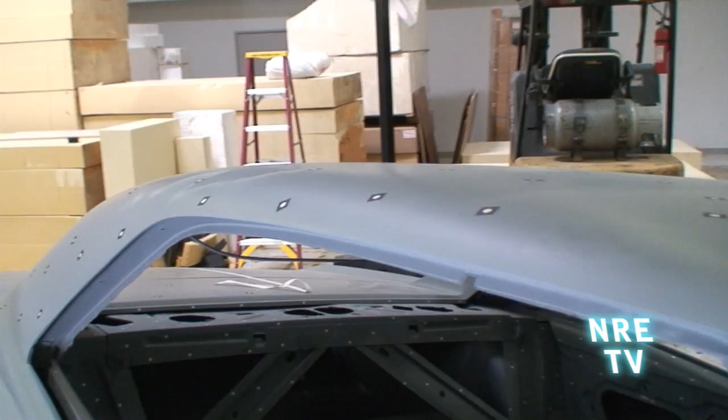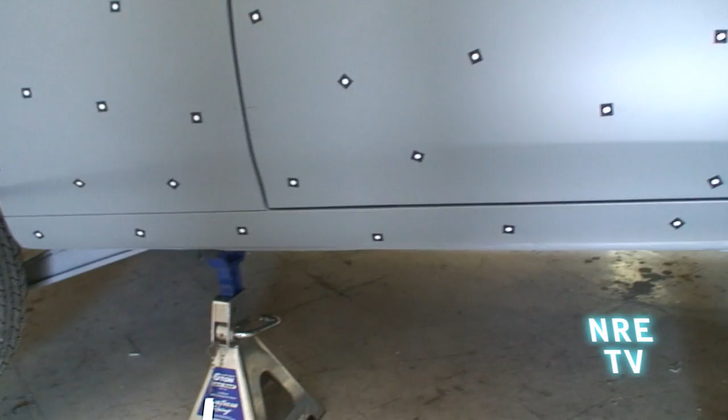So this is the GTO where it sits right now in the process of the building. Just kind of wanted to go over a couple things that we've done. We've skinned this quarter, so we cut this quarter out and replaced it. We took off the drip rail on the roof here. We got rid of the door handles. Got rid of all the trim holes because we're going to end up blending all of that in, so there's no trim on the bottom there.

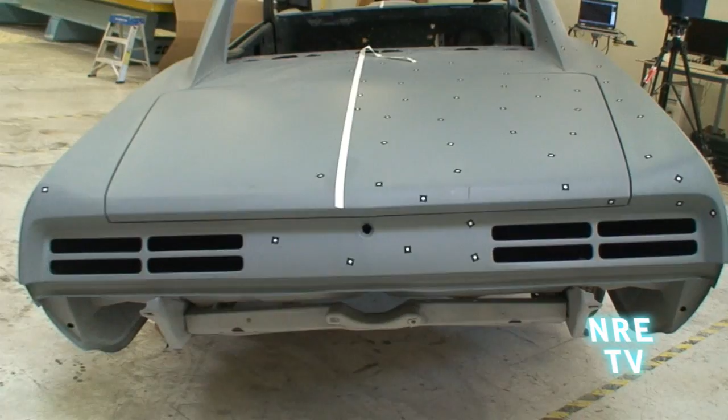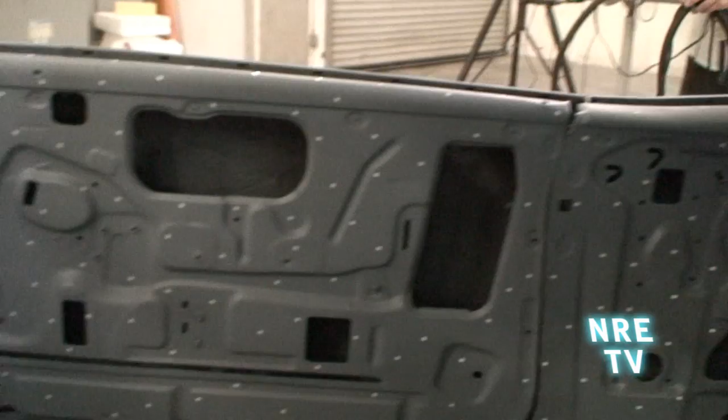Used a shrinker and replaced a lot of the metal around the windowsill. We've pretty much blended the rear tail lights into the fenders there. We sandblasted the entire interior, exterior, did all the metal work. We started doing some rough body work and got it ready for 3D scanning. So we're just finishing with 3D scanning at the moment. You can see all the little white stickers on the inside of the car everywhere.

What this is going to do is provide a great way for us to lay out the engine and the transaxle, roll cage, dash, center console, you name it. I mean, our goal with the car is right here in the rear, we're going to actually make a custom bumper with diffuser panels and exhaust outlets.

And so we're going to get the scan data, and then we're going to develop a 3D CAD CAM program in there, and then cut the negative out of that and make the part out of the negative. And we'll do the same on the interior. That's why we've got the interior basically gutted at this point.

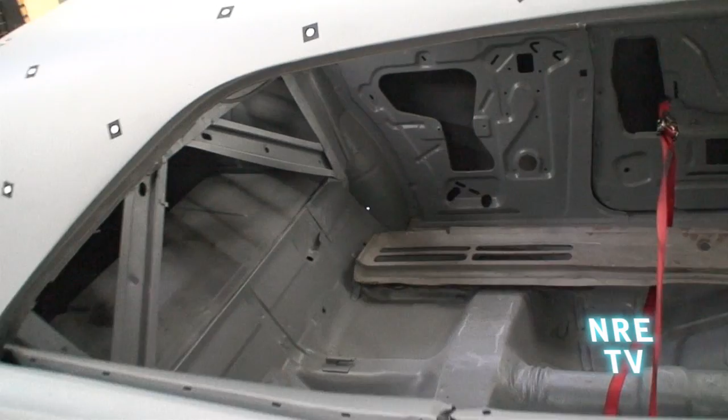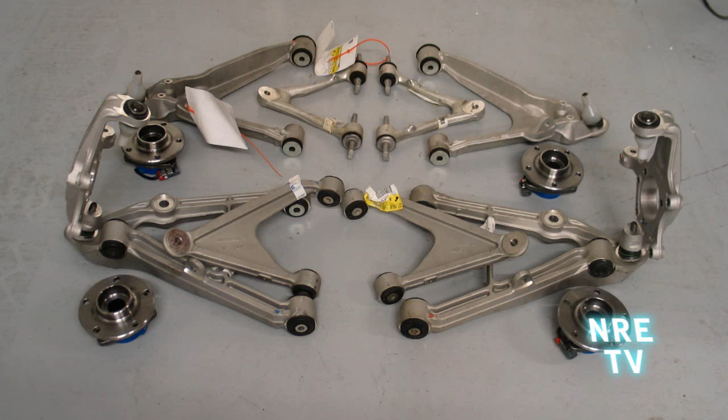So we've basically gutted the interior, took the dash out. We're gonna make a custom interior. We're gonna make it look like an Aston Martin inside of this 67 GTO. And it's basically a whole new realm of what we can do with a hot rod. I mean, it's bringing us to like OE status with what Alfred here can do for us.

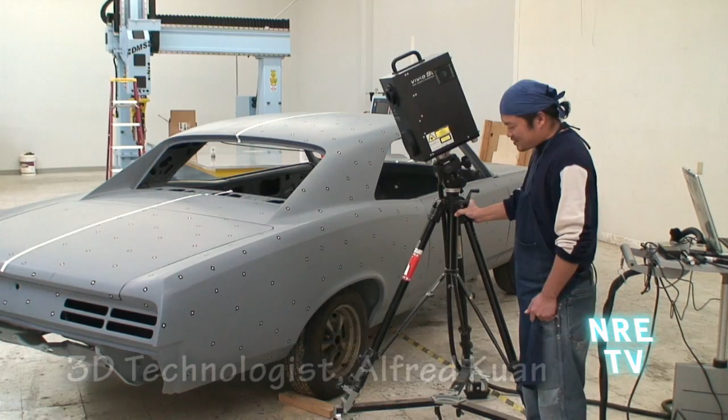So it's pretty cool. Okay, so basically for this project, what we're using is a red laser-based 3D scanner, and we're going to digitize this car. And in order to do that, what we've done is put a lot of these markers or targets for scanning. What that does is that helps us align each individual 3D scan of the car.

What we're doing is that we scan the car, and the entire car is composed of about maybe 200 to 300 different shots individually. And so each shot that we take covers an area maybe a foot and a half, maybe about 2 feet wide. And so the markers are there to help us align all the different shots together. And at the end, when we merge all the data together, we get this car in 3D.

So what type of equipment are you using there, basically? We're using a Konica Minolta Vivid 9i. This is their top-of-the-line scanner for general purpose. We've had this for about 4 years, and it produces really good results. It comes with 3 different types of lenses.

There's a wide-angle lens for scanning really large objects from really far away, but it produces not the best results. The data is not accurate. So the further away you are from the object you're scanning, the less accurate the data is. There's a middle range lens, and then there's a telephoto lens for high res, closer work, if you're scanning an object from about maybe 500 to 600 millimeters away.

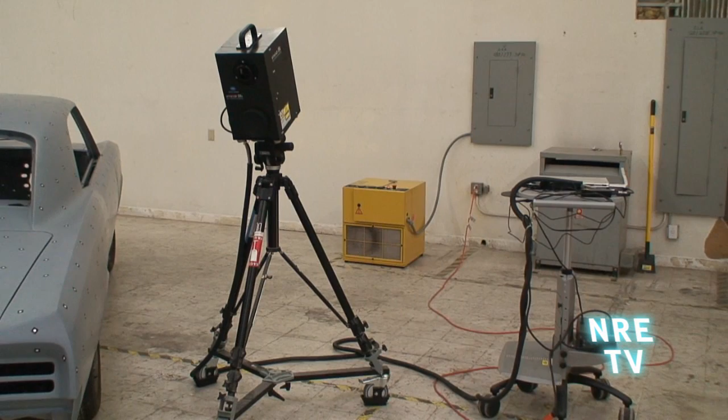But it's basically going to transform the way we can build cars, because we can recreate the actual surface, and then we can model parts off of that. So the sky's the limit. It's like getting a welder for the first time when you were a kid. This is like the Wild West of building things in the hot rod world.

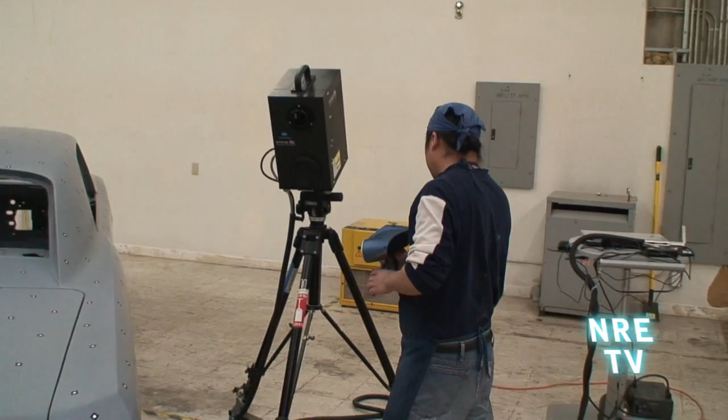We use that Minolta for the outside, and then we use this handheld system. You hold it, it's hooked up to the computer with a USB cable. It weighs about 7 pounds, so after a while it does seem heavy. But this lets us get into the tight corners inside the car that we can't otherwise do with the Minolta. So it's basically the mini version to get into little tight areas.

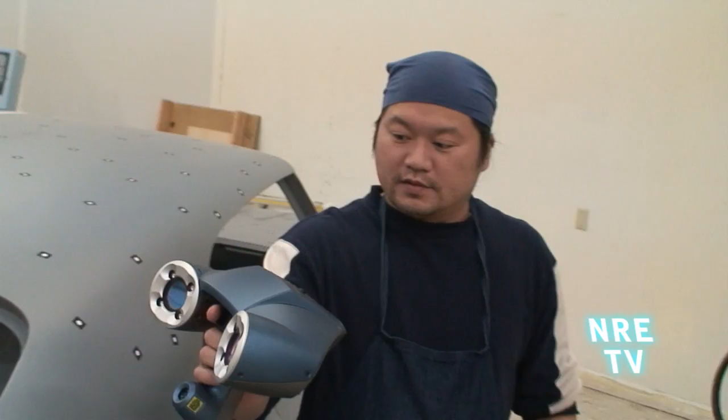Let me see what that actually looks like. Can we get a close up there? What's the difference in the colors there? What is the purpose of that? Or actually, no, they're the same. It's just the way the light reflects to it. Huh.

What does something like that cost? This one I got used. This was a demo from a dealer. Three years ago, this thing brand new was close to 60 grand. Just imagine dropping this, right? I have nightmares, man. I have nightmares about working on a job in a desert somewhere and dropping this thing. I got it used for about 30.

Wow. Sure, and then basically you take data from that unit, and then you overlap data from the small unit onto it in areas that you can't get. Right. And that'll basically paint the whole picture for you.

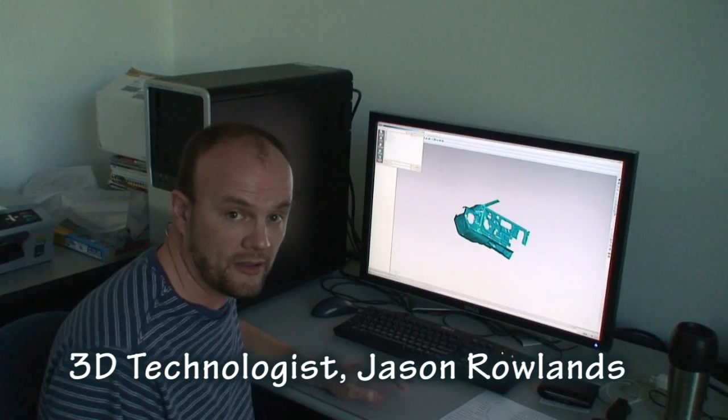Okay, my name's Jason Rowlands. I'm helping Alfred here. This is software called Geomagic. What you see before you is the sections of the scan which I've taken. These are all the separate files that we've taken thus far, and what I'm trying to do is basically like a big jigsaw puzzle. Each of the scans comes in at the origin, and they don't know about their neighbor.

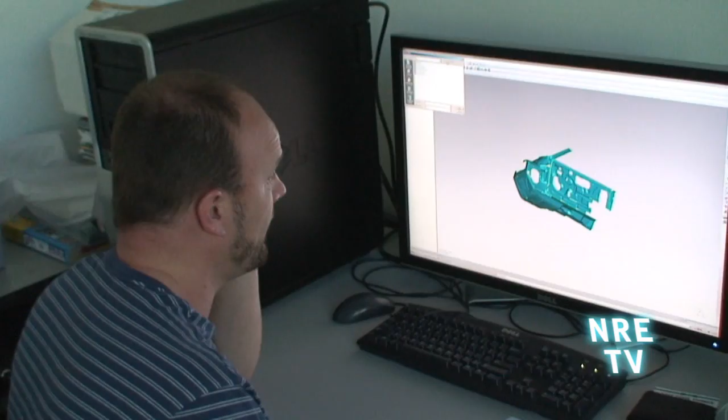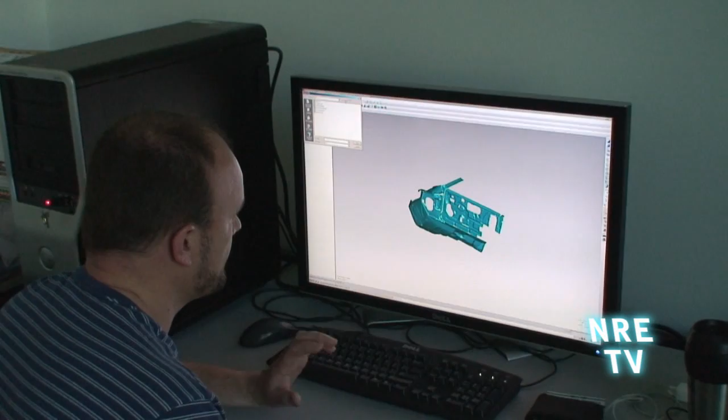So my job is to take each scan and trim off what you call floaters, the bits and bobs of the scan which we don't need, which don't make up any feature in particular, and then align them with respect to each other to complete the picture. Some would say it's a bit tedious, but it's kind of cool seeing the picture develop. And you've also got to make sure that the normals are the right way around, and that's what you saw just now with the difference between this blue and this yellow appearance.

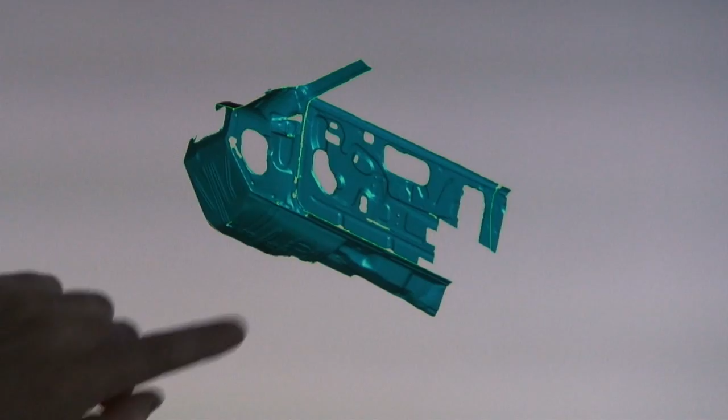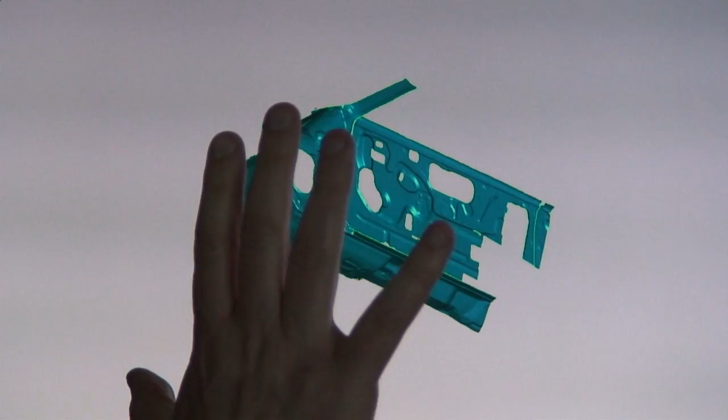So I piece the scan together, looking for similar features where the scans overlap. If I've painted it with a roller, if you like, and picked up a section of the door panel, the neighboring part of the door panel has got one of those features in it. So then I can tell the computer, from here to here, from here to here, from here to here, and it aligns those three points and says they're close enough, and then I merge the scans together, so I've got one big block of polygons, and that's how the process continues as we go around the model.